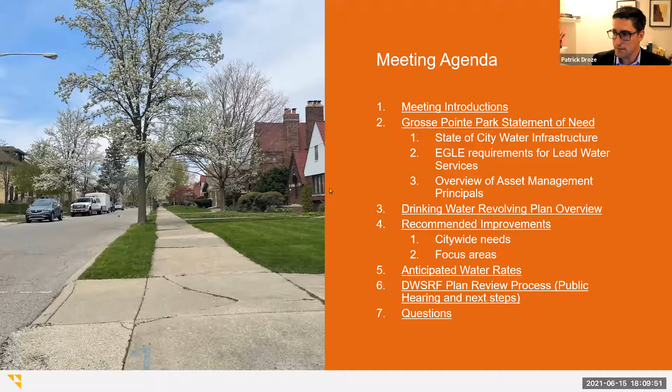Okay, hearing none, we'll get started. So when we talk about the water system as a whole, as you mentioned at the beginning of the meeting, Mayor, people don't talk a lot about water mains and sewers, and the reality is it's buried infrastructure. It's been there for a long time, and unfortunately with infrastructure like that, it doesn't really get into people's minds until something happens, like a water main break or a sewer collapse.

But in our case, with the City of Grosse Pointe Park, we have a few drivers about why it's time to start looking at that. One thing is just the age of the infrastructure. Throughout the city, there is a very high percentage of the pipes in the ground that are original, going back to the 1920s in many cases. And although things were built very well back then, the accepted life cycle for cast iron water main of that vintage is around 100 years or less. So we're starting to get into the point where breaks may become more frequent and more impactful as those happen.

The other part of that is our water meters. We have old water meters, and what typically happens with those as they age is they become less accurate and more difficult to maintain. So water meters has been something that the city DPW has identified for a long time as something of interest. The other change we'll talk about is the lead and copper rule.

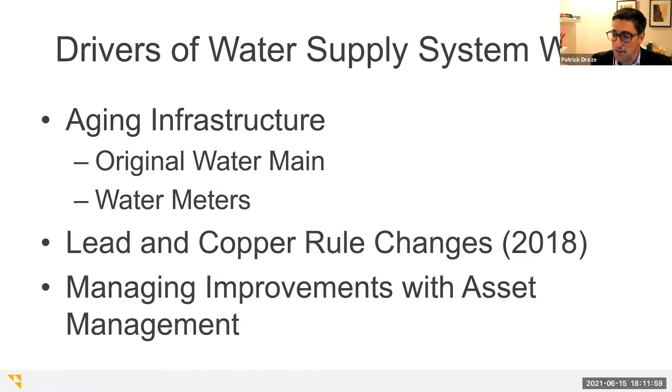So that's just a program that the city is adopting as part of their management of the existing system.

Looking at our aging infrastructure, our mains in general are really approaching the end of their design life. Most are getting near 100 years old. What we're starting to find is that there's an increasing number of breaks. This is the average breaks per year that we're seeing, and this is data collected by DPW.

As you can see over the last 15 years or so, that rate has started to go up. That can mean different things. Water main breaks can happen in somebody's front lawn, or on Mack Avenue. Those mean different things in terms of costs and impacts to businesses. But the reality is that the number in general is going up, and it's what we'd expect as mains get older. Especially because once we get to that 100-year mark, we're really at the end of the useful service life.

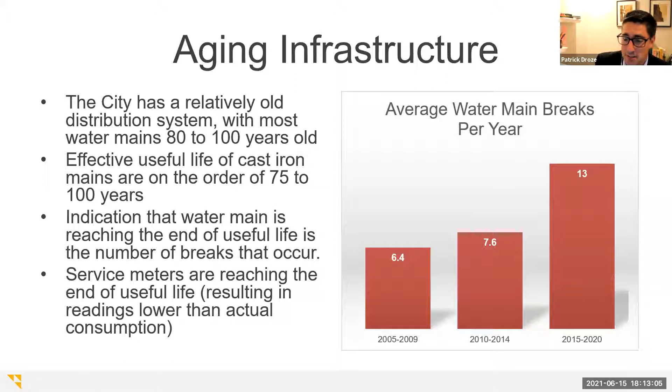The same goes for the meters we mentioned—those are also in disrepair and harder to maintain, just because parts are not available for some of the meters still in the system.

On lead and copper, we're all aware of the changes to the rules on lead and copper. It was brought to the forefront by the Flint water crisis years ago. But what it's resulted in is that the state of Michigan now has the leading edge of what's required for water quality relative to lead. The state, with its changes to the lead and copper rule, has reduced the action level to 12 micrograms per liter.

There's a very rigorous methodology for how samples are taken at homes throughout the city, looking at actual taps. You collect samples at those locations, get them analyzed, and report them to the state of Michigan. If you're above that level of 12 micrograms per liter, the state will require that action be taken immediately to deal with that.

The good news is that the city of Grosse Pointe Park receives its water through the Great Lakes Water Authority. We have 3 separate connections. The Great Lakes Water Authority does all the treatment of the water and also puts in additives to prevent corrosion. So even if there are pipes that might have lead in them—certainly old brass fittings can—the corrosion protection put into the water prevents that leaching of lead.

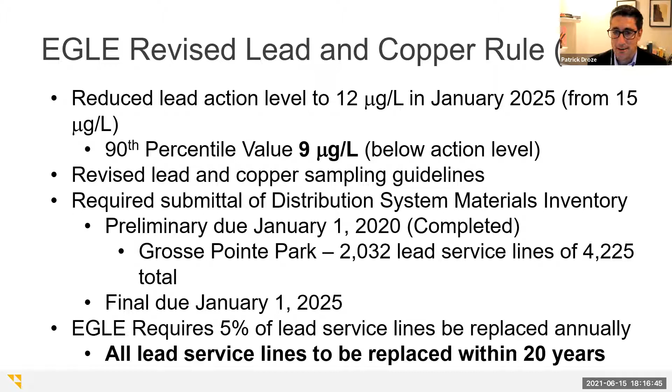What the state of Michigan is going to require is that communities work to address 5% per year. Beginning in 2025, there will be a requirement that cities have a plan in place to deal with the lead service lines. It averages out to about 5% per year, so roughly that's about 100 services that would have to be taken care of.

Patrick, can I ask you a technical question at this point about the definition of the service line? You indicated it's the line between the house and the main, which I understand. Somewhere between the house and the main, pretty close to the main, is typically what I refer to as a

curb stop - the valve that can be turned on and off. Does a service line include, when we talk about service lines and the probability of lead, all the way to

the main itself, or just to the curb stop? So the service line itself refers from the main all the way to the house, so it includes that curb stop.

There's actually been a bit of spirited debate amongst the utilities, especially in Southeast Michigan, about who actually owns the service line between that curb stop, which typically is at the sidewalk, and the house. Traditionally, that's been determined to be private infrastructure, but it's basically been agreed to at this point that municipalities are responsible all the way from the meter to the water main, so that includes that curb stop, that whole route.

Yeah, I understand that. In fact, that is a change - what you just described is actually a very important feature of this going forward. As private infrastructure, anything we do on a service line would be billed to that individual customer. But as public infrastructure, the cost of anything we do to that service line is borne by the entire municipality. So it's an important distinction in terms of ownership.

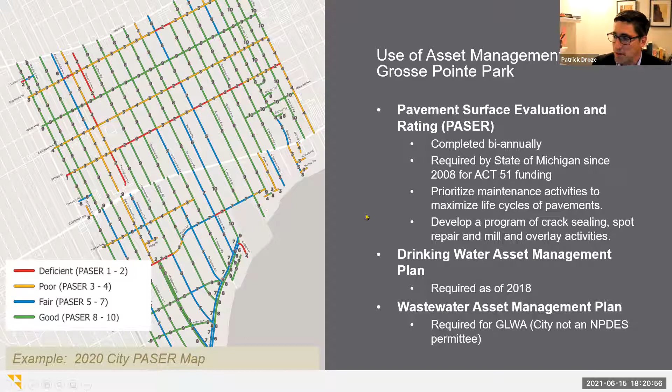As I mentioned, asset management has become more of a requirement, not only just from best practices, but also relative to permit obligations. So in 2018, water systems were required to comply with that, as well as wastewater systems. Now the city itself is nested within the GLWA system, so we don't have an NPDES permit specifically for the city, but if you had your own treatment plant, you would have to comply with that - asset management for your whole system.

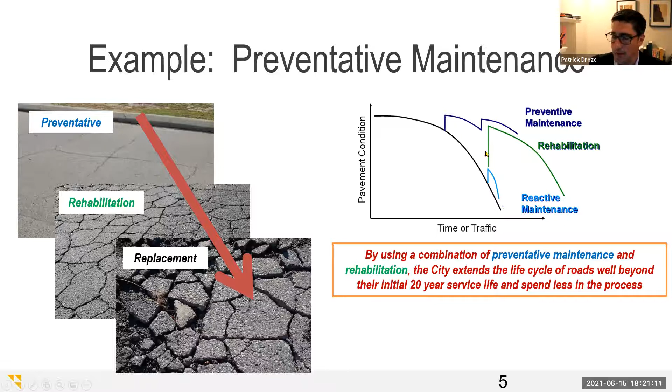This is just an example. We're basically showing that it's many times more efficient to do preventative maintenance early on versus waiting until it goes to total failure and you have to make a larger investment. So generally, this example shows if you just let everything go to full decay and then do large interventions, in this particular example, you're going to spend more money maintaining the same average.

Actually, this is a slightly less average rating. In this example, over the 36-year lifespan, we spend $3.30 per square yard per year, and the average rating is a 6.

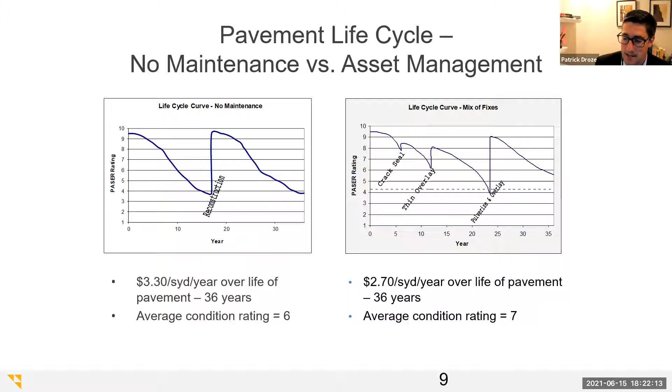We can spend a little bit less and do it more in a preventative nature. On a pavement example, we might do crack sealing, then a really small overlay, and then a more rigorous overlay 20 years down the road. So we might do smaller interventions spread out over time. We have a better overall condition and spend less on it. That's the whole perspective on asset management: we try to maintain our system and work on the priority assets at the right time.

So with water, it looks a little bit different in terms of how we manage that. We really rely on the asset management plan, which Nick has mentioned. That document is an appendix within the project plan. If you care to understand the details, it talks about how various segments of water main or areas of the city have been identified as priority.

It really looks at things based on the data of the main. So we look at how big the main is, the water main size has kind of changed. There are some instances in the city where we have smaller diameter mains, might be 6-inch mains. Typically now we require that everything is 8-inch or larger. The smaller mains have potentially less pressure and can provide sometimes less fire suppression. So those are identifying properties of mains that might need replacement.

We also really look at some of the business risks of the mains. To put it plainly, a break on a residential street may have an impact to residents, like potentially a loss of a driveway temporarily or some street flooding. That might be a different scenario if it plays out on Mack Avenue, where you have more paved surfaces. Those mains are more expensive to break, and they could potentially impact critical businesses, doctor's offices, things like that. So those are other parameters used in the business risk evaluation.

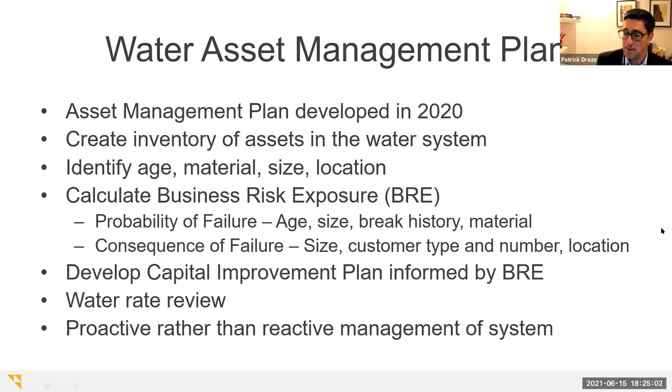Ultimately, all that analysis eventually goes into developing a project plan, which we'll show you in a little bit. We try to also review that against the water rates. There are a lot of needs, and we want to balance that with being cognizant of what that's going to do in terms of a rate increase, because there's obviously a cost to that work, and how do we spread that out over time for the community.

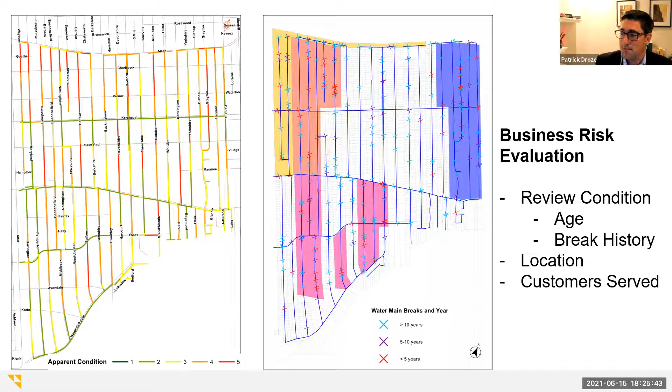This is just kind of a high-level review. We'll show these with greater detail later, but you can see these highlighted areas here. These are the priority areas, which we'll document a little more later in our presentation. The small X's you see throughout here are the main breaks. That's one of the things, along with the apparent condition, that we'll use to help identify where projects need to happen. The other component of that, of course, is the lead service lines, which we also use to help identify where those potential projects might land.

Before we go into the DWRF section, any questions about that last discussion?

I just have a quick clarifying question from residents, following up on what the mayor was saying. When we talk about lead service line replacement, is it all exterior, or both exterior and interior? Typically the way the rules are written, it's about 95% exterior, but we will come into the house, into the meter. The typical measurement is no more than 36 inches inside the house, and that typically gets you to the meter. So there could still be piping on the resident side within the house, but the guidance from EGLE says basically to the meter or 36 inches, whichever is shorter.

That's somewhat analogous to what DTE has done with the gas mains or with gas service lines.

Sure. Okay, thanks. Yeah, sure.

Also typically with a lot of those houses, the service lines come in at different spots, especially with finished basements. So if you've got a finished basement, you may have to access a different spot. With directional boring, a lot of times you can do it right at the front wall, or they'll have to go underneath and maybe go 5 to 10 feet inside the house itself, underneath of course.

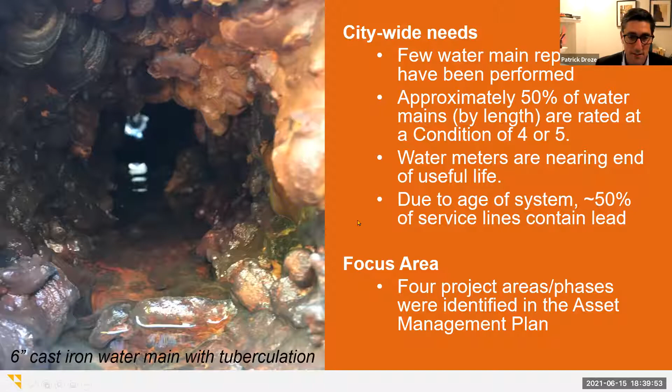Generally speaking, some of the main recommendations are that any smaller diameter mains, generally ones less than 8 inches in diameter, need to be replaced. It comes down to there being diminished water quality, lower pressure, and the ability to provide flow is compromised with these smaller mains.

We also recommend looping, which basically takes any dead end main and connects it to the network, and that helps with overall pressure and water quality. We also look at replacing our hydrants and valves within the community.

If we go through the effort of replacing mains and service lines, we want to make sure that the valves we use to control the system are also still in working order. We mentioned also that the water meters would be replaced at the same time as lead services.

Interestingly, if you disturb any portion of a water service doing any repairs, there are protocols required to be followed now relative to the lead and copper rule. So even if you decided to just do meter replacement, there are still steps necessary to make sure that water is safe before we turn it back on.

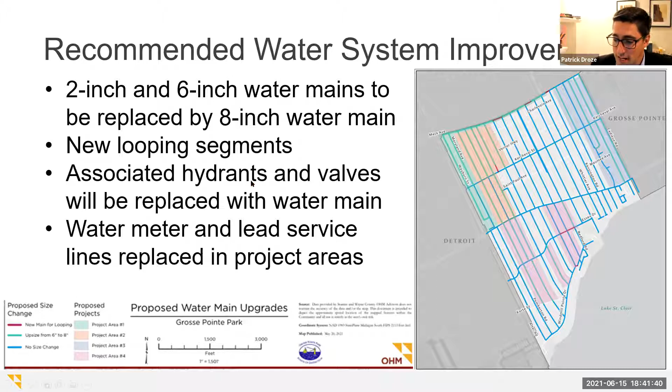So these projects make sense to layer on top of each other, because if you're already digging up an area, if you're already replacing a water service and the main itself is old, there's usually economies of scale for bundling those into projects. I'm going to go through a couple of the project areas.

Generally speaking, water main replacement is part of every one of these four phases that we'll go over. There are slight variations about how that would get built, and the project plan basically lays out alternatives for how we can do that.

There's what we call open cut construction, which is what you might assume: an excavator digging down a trench about 5 feet deep, putting a new pipe in the ground, connecting water services to that pipe, backfilling, and then restoring any of the impacted areas.

The other method we looked at was what we call trenchless installation, similar to what DTE was doing with new service lines or new gas mains being put in through the city, where we identify locations where the new pipe can be pulled into place, and try to limit the number of excavations that we make.

Even with that, there are still impacts. Of course, sidewalks and driveways get impacted, but we try to work in those greenbelt areas. By using directional drill, we can also try to limit the impact to tree roots. If we do open cut, even if we go around the trees, sometimes there's damage done to the root systems that can compromise tree health. So directional methods of installation are preferred, especially with so many mature and well-maintained trees in the community.

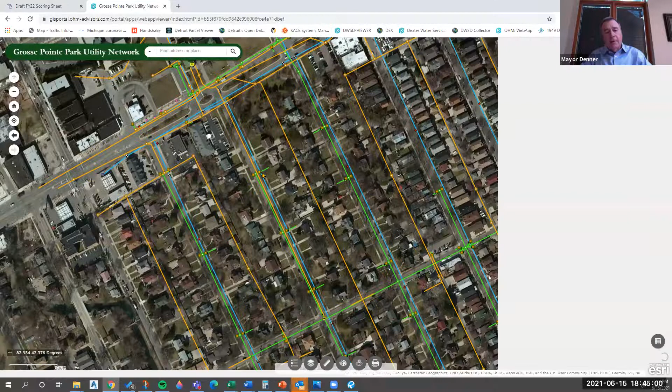Yeah, I can confirm that, ask anybody. I'm sure Pat can as well. Thinking back to the sewer separation project, which went right down the center of the streets with an open cut, it was extraordinarily disruptive, and it took years before you could really restore the smooth integrity of our streets.

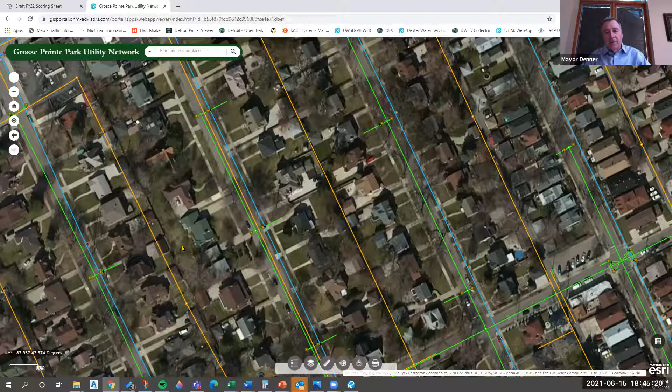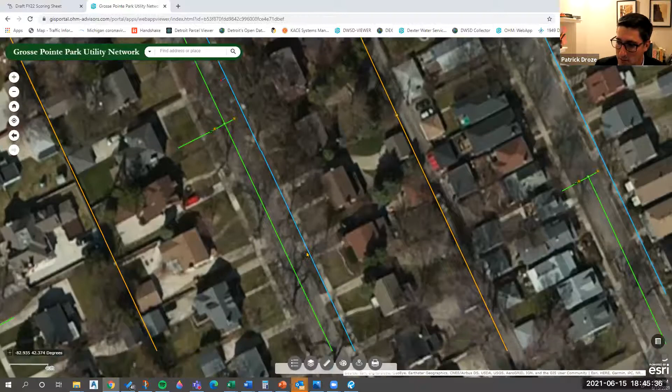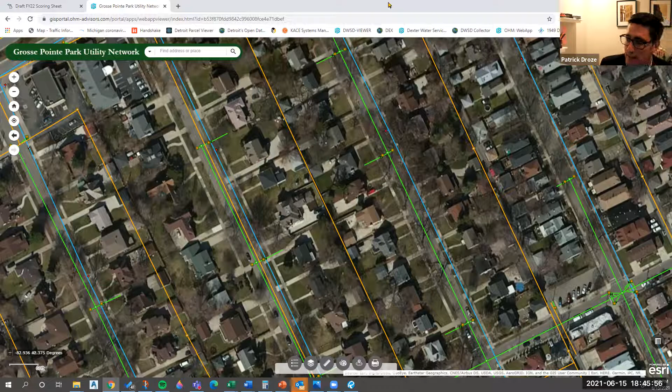Absolutely. I'm not sure if folks can see on my screen the GIS viewer, but this is just an example. Typically our storm sewers are down the middle of the road, as Mayor Denner was saying, and our water mains will often be in that greenbelt area. Sanitary sewer, in many areas of the community, is in the rear yard area. So the water main itself often would be located in that same area, or we might even switch to the other side of the road if there's a corridor. That can vary from street to street, but generally we find it's most cost effective to focus that main somewhere in that greenbelt area.

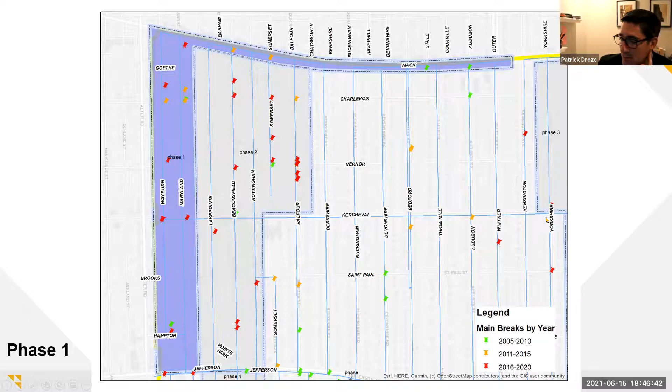Now, interesting about phase 1, we have a photo here on Mack. Phase 1 works north from Jefferson on Wayburn and Maryland, but we also have Mack identified. As we mentioned earlier, one of the things we look at is the presence of breaks. You can see there are a number of breaks in this particular area, but we also have the consequence of failure. If a main does fail on Mack, it's an impact to businesses. Those are generally more expensive because we have to restore roadways and sidewalks, and there's even potential for property damage depending where it happens. So this was identified as a high priority project area because of all those factors, and this would be our phase 1 project.

There are 4 phases that we talk about. We envision that this would potentially be a 4-year project where we'd do one phase per year, just to control where the work is happening and make sure we can keep contractors contained year after year.

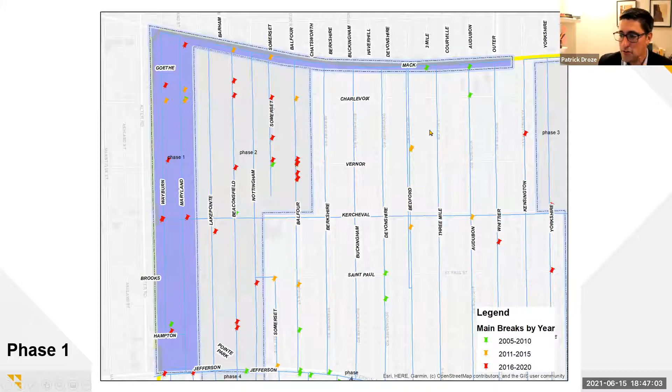Phase 2 is very similar. Again, we're looking in this case at Lakepoint, Beaconsfield, Nottingham, as well as Somerset and Balfour. I'll show you the similar map on the next slide. We'll be doing the same with trenchless installation, and about 400 lead service lines in this particular area. We've recorded about 10 breaks since 2005 in this area. So in this example here, again, here's our greenbelt area. The main itself could go somewhere in here, or it could actually go into the sidewalk. We would identify, based on what other utilities are in the area, what makes the most sense from a cost effectiveness standpoint.

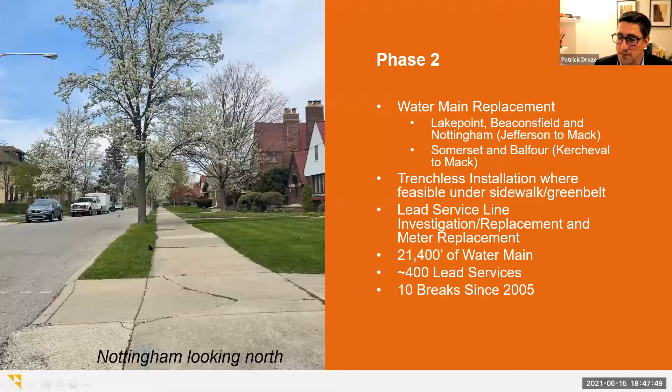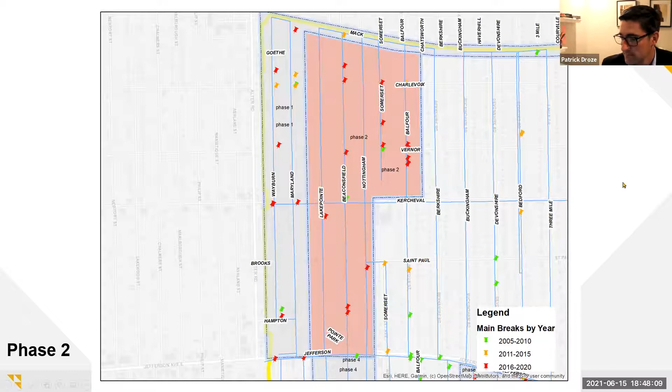Again, here's our limits for this particular phase. You can see there is a concentration of breaks in this area, and the presence of lead service lines helps to elevate this particular project as a recommended focus area. And again, this is phase 2.

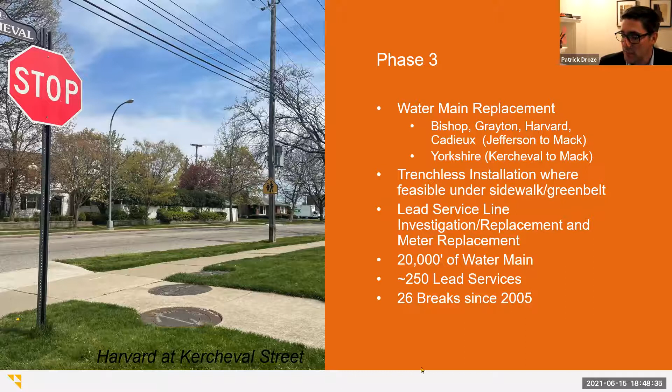Phase 3, this time we'd be looking at Bishop, Grayton, Harvard, Cadieux, generally from Jefferson to Mack, as well as Yorkshire between Kercheval and Mack. A little bit longer here - we have 20,000 feet of water main, slightly less lead services, about 250 compared to phase 2. The issue here is we've had a higher number of breaks in this particular area. So again, this is our limits here. We'd just be doing main replacement. The section on Cadieux would be on the west side of the street, obviously.

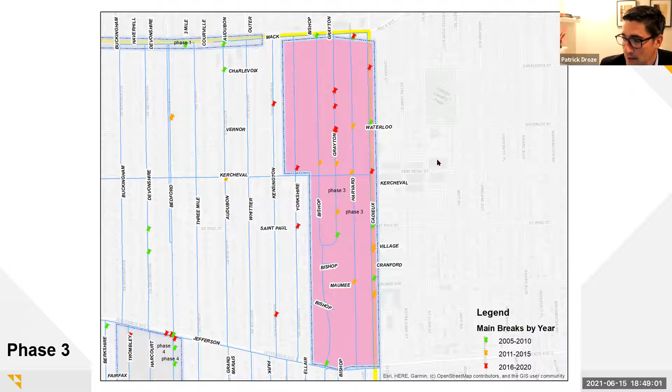This again is phase 3, which should probably be the 3rd year if we were to roll these out over a 4-year program. Phase 4, we'd be looking at Lakepoint, Beaconsfield, Nottingham between Forte and Jefferson, as well as Balfour from Windmill Pointe to Essex, Trombley and Harcourt between Windmill Pointe and Jefferson, and Bedford from Essex to Jefferson. That's 22,000 feet of water main, about 125 lead services, so slightly less services in this area, and about 34 breaks since 2005.

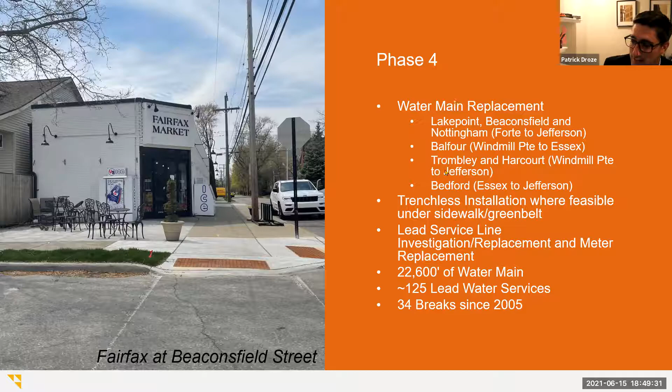This is a little more cut up, again based on the presence of breaks. For instance, on Balfour, we do place a little more importance on some of the more recent breaks too, especially if we start to see them pop up with more frequency. You can see, particularly over here on Bedford, there's quite a few breaks in this particular area. So this is, again, some of the background about why these particular areas are noted. But this would be that phase 4, which would be the 4th year of the program.

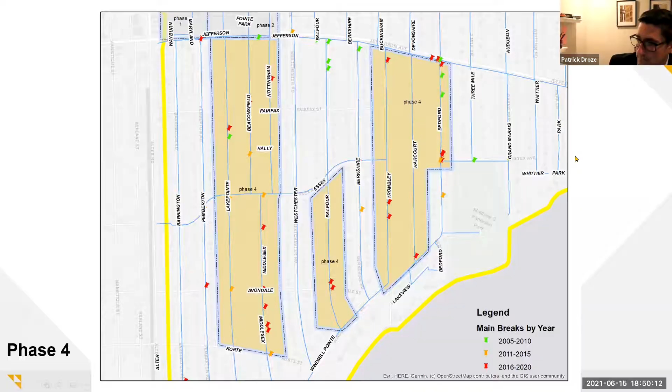So there's a question about cost and what that potentially means from an impact statement for the homeowners in the area. The project costs are estimates based on unit prices. We look at projects in other communities using similar materials, and we also look at trends in contract pricing, and use that to determine what we estimate a cost to be for a given project.

So in total, if you add all these projects up, it would work out to about $27 million worth of infrastructure investment. As Krista mentioned, there's a 20-year and a 30-year loan period. Just to show how that would impact a bi-monthly bill, if there were no other adjustments to rates, those rates could change up to $66 for the bill, or $49 for the 30-year term if that was used. So either one could be used.

There's just some differences with the interest rates on those, and how long the payback period is. So those are not insignificant amounts. We would certainly acknowledge that it's an impact for sure. But it takes a very significant impact to the lead services, which, as mentioned, will be required to be replaced within 20 years. In addition to the mains themselves, we knock out about 60% of the services within a 5-year period. So in many ways, you're getting ahead of things. Where you really have 20 years to do that, you'll be at 60% completion of lead service renewal within the first 5 years, which makes the burden of doing the renewals for the remainder of the system something you can spread out for a longer term.

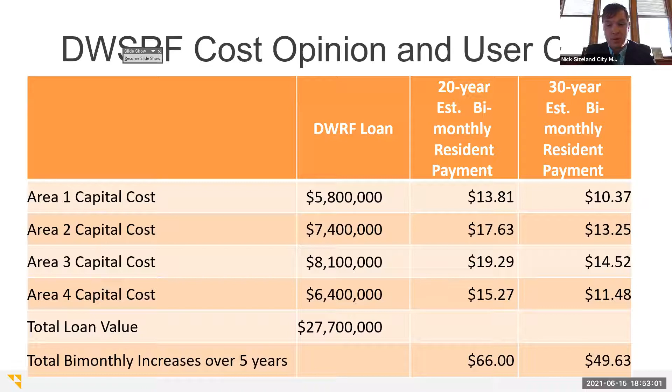And Patrick, just to put this into perspective for the public and committee too — if we were to look at the sewer separation that was passed by voters about 20 years ago that Pat Thomas worked on, the millage rate for that was 2.55. So if we take the average taxable value of a home, let's say $150,000 within Grosse Pointe Park, we were looking at about $380 a year for the sewer separation. So we're right around the same, if you average out either the 20 or 30-year costs of the sewer separation project and what this project would be.

So you're looking at potentially about $300 to $400 at our estimate right now if this full project were to go for the $27 million over a 20-year period. And that sewer separation project was retired in 2018, I believe.

So you're saying the average taxpayer would see an additional $300 on their property tax bill? Per year, yes. I think the way this is funded, though, would be through water bills as opposed to property — yeah, sorry, it'd be through their water bills.

And if I could just clarify, just confirm — that's not per household, that's per resident? It's per bill, so per meter. Okay, all right, thanks.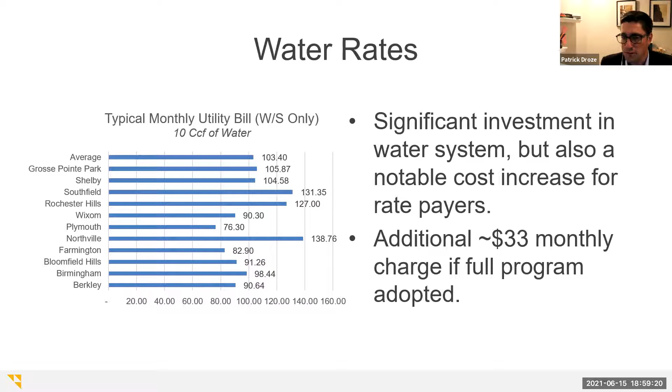Within the project plan, there's a section of the report that goes into greater detail about this, with the interest rate and number of accounts. So if there's questions about how that particular cost was calculated, there's additional information there.

Any questions about that rate discussion? Okay.

Krista, do you want to touch on these next steps for the project plan? Sure.

The public notice for the public hearing was published in the Grosse Pointe News on May 27th. We need an affidavit from Grosse Pointe News showing that it was published, which we need to include in the appendix to the final project plan. The public hearing is scheduled for June 28th, 2021, a Monday, and as part of the project plan requirements, we need to provide a recording of that public hearing.

We need to provide that link to EGLE, and then EGLE will look to see which of the project plans they actually did receive and adjust their project priority list, possibly rescore some of the projects based on the details provided, since the intent to apply form is pretty general. They would usually public notice that list in mid-August, then hold a public hearing on the list for people to make comments, which usually happens in September or October before it's finalized.

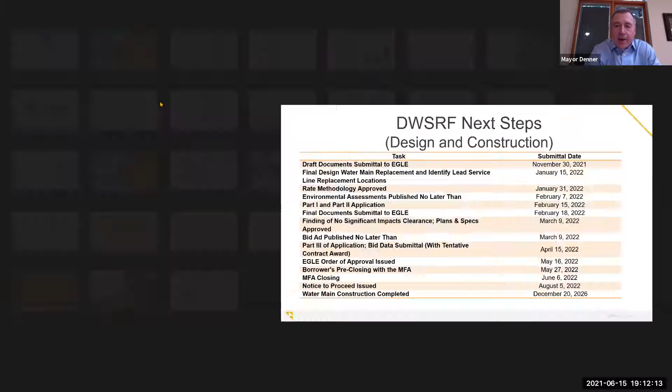So it's a tough decision in some ways for the city, and we're going to ask council to consider at least the first step, which is to apply for the revolving fund after the public hearing on the 28th. If we don't make the cut, then I think the conversation moves to the administration and our engineers continuing to do some analysis. At that point, council would have to decide whether to try again next year, do a little bit as necessary, or proceed on a bonding strategy.

I've thought a lot about this over the years, and I was unwilling to take on this kind of an annual burden for our residents until we got sewer separation paid for. That was a fairly significant burden on the city, which obviously had great benefit, but it was a big burden on the cash flow of the city. With that off the books starting in '18, that helped us.

Realistically, though, we have put some things back on the books, and the residents did approve millages for our roads and public safety. I would say that, as much as anything, that was to compensate for the unusual way municipalities get financed in the state of Michigan because of Headlee and property tax limitations. So that's my little speech on this, but that is the decision the city is going to be faced with at some point.

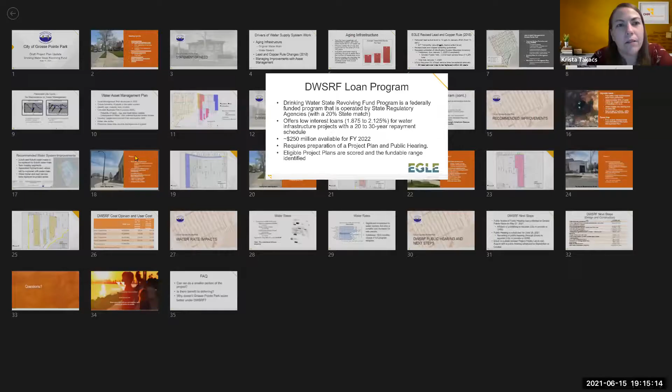But maybe speak to that a little bit more, Krista. By passing the resolution, you are not committing the city to going forward. I think at that point you can still say, we prefer not to be considered. I would say that by mid-August, when the list of priority fundable projects is published, if you were to be on it at that point, you would need to say yes, we're going to go forward with it, or please take us off the list.

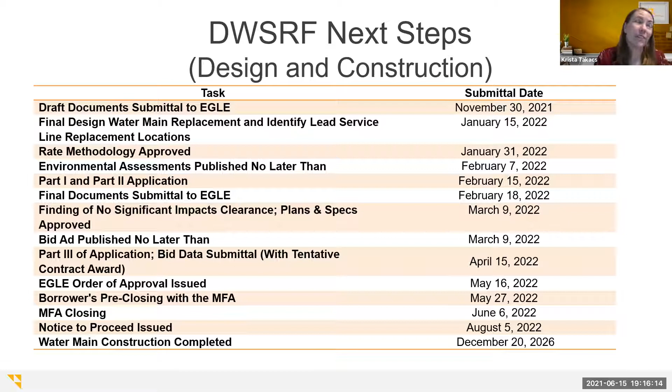You can do less than what you're proposing. So if you wanted to do phases 1 and 2, but not proceed with phases 3 and 4, you can make that decision. You couldn't say we'd like to replace phase 2 with a different area of the city that we did not discuss in the project plan, without submitting an amendment to the project plan. Typically, EGLE does not like to see those off cycle, so you would have to wait and submit those next July 1st. I would hope that we wouldn't need to do any of that, but I just wanted to get some understanding.

So it's an important milestone for us, June 28th.

I have a question. Is there any way that us pursuing an alternative like the bonding would allow us to expedite these things? It's still a pretty long timeline. I'm just curious if we did option B that you mentioned, would that allow us to do these things more quickly? I think local bonding will move much quicker, at least in the initial phase of things.

There's still definitely some time and energy needed to design and permit the improvements. Typically on a municipal utility project, say you were to say we want to replace a water main next summer, the process we would typically follow on a local project, assuming you have funds in place, we would start on design, where we go out and understand where all the utilities are, topographic surveys, request information from utilities, design, and then there's a permit phase where we submit the documents to EGLE to review and permit. That typically is conservatively a 6-month process.

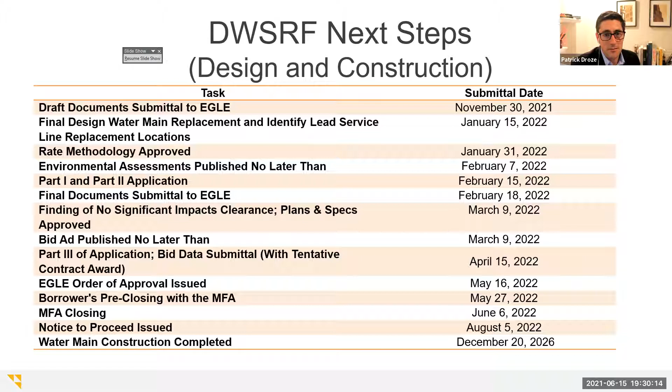We built in about a 10 to 15% contingency. They have a standard contingency we carry for design and legal costs that typically get included, though we don't see a lot of that in this particular project. We do have to do a rate methodology through the process, and design is part of it. In some cases, like building a new water treatment plant, you'd have to acquire land and easements, but our work will be, with the exception of lead service lines, all within city right of way, so we don't anticipate needing to acquire land as part of this project.

Thanks, Patrick. I had a couple questions. One is, what does it typically cost us just when we have a main break unexpectedly?

As far as water main breaks, it depends on where it's at. Like on Mack Avenue, the impact on businesses depends on whether we can get the main shut down properly and isolated in a good area. The valves are so bad sometimes you've got to go back the street, so then you've got residents included too. Typically on Mack Avenue we require 4 people, that's an OSHA rule, along with cones and everything else. It typically takes anywhere from 6 to 10 hours, with manual labor, cleanup, repair of the street, and backfill of 21AA. You're looking at probably $7,000 to about $9,000.

Okay, thank you. And the other question I had was, one of the slides indicated that without replacing the meters, we're not getting proper readings on the amount of water that's being used. So one thing to keep in mind in terms of informing residents is that it sounds like their water bills are going to go up as well.

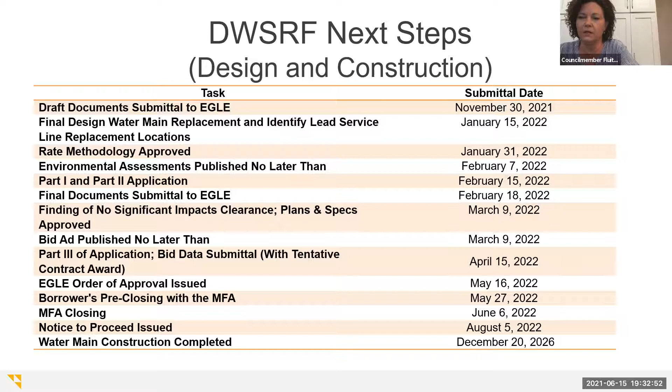So a more accurate meter saves the city money, but it costs the residents because now they're actually paying for the correct amount of water they're using.

Exactly. And what can happen too is that, because there's a cost to acquire water from GLWA, as well as operational costs the city tracks annually, that cost gets spread out. So if you have certain homes with very slow meters and some that are more accurate, it can disproportionately assess those costs onto the folks with accurate meters, because it assumes they're using more water when that may not be the case. So having a system with consistently operable, accurately reporting water meters makes sure everyone is really paying their fair share for how much water they're using.

Right. The other thing to keep in mind on flow rates is that over time, GLWA, Great Lakes Water Authority, has moved a lot of their costs from flow rate to fixed. So while it's absolutely true that more accurate meters give us better reads and more accurate revenue collection, as a percentage of the bill it's not as large a percentage as it was, say, 10 years ago, when it was a significant component of everybody's bill.

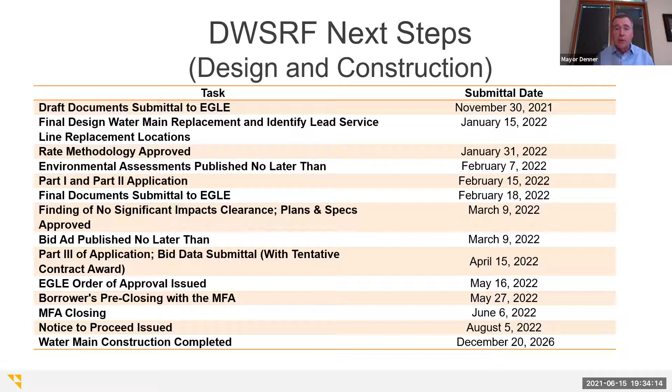Today, it's still obviously an important component, but has diminished in its percent. I don't know exactly what, but Great Lakes Water has moved cost from variable to fixed.

The other question I've got, as we're thinking about cost and other charges, is assuming the federal relief money comes in as anticipated, we're expecting a little over $1 million to Grosse Pointe Park. Some of that has to be used for purposes other than underground infrastructure, but some could be applied to water infrastructure—let's say $600,000, $700,000, $800,000, something we probably could count on applying. Nick, has the city thought about what the priorities would be when that money comes in? Would it be to begin phase one essentially, or would it be to pick up some of the things left out? Have we thought about how we might apply that money?

Speaking with the DWSRF project, our first priority was phase one, which is the Weyburn, Maryland, and Mack Avenue area. Our initial strategy was that if we applied for DWSRF, or ended up going out for a bond, and identified those areas of lead service line and water main replacement, we could use those funds for other areas of the community that aren't as much of a concentration. That's why Patrick and his team had those different areas, because that was the highest concentration of main breaks and lead service lines we could tackle all at once.

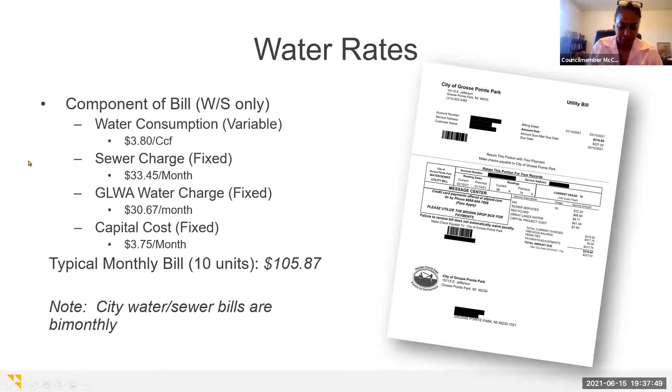Can I just—so we're not restricted to using the rescue fund dollars for projects with specific outcomes due to COVID? I know infrastructure was on there. I've been feeling pretty confident about this, but someone else has made me second guess it a little bit. So I just want to make sure that's okay for us to use those dollars for that kind of work.

And when you said the 133 lines replaced, would that also include the water main or any related infrastructure replacements at the same time, or no? That would only be lead service lines. It's average about $6,000 to replace just a lead service line per home.

Okay, sorry, to follow up on that—so after we've spent the $27 million, we'll be left with about 800 additional lead service lines that we still need to replace. That's correct. And at $6,000 each, correct? That's correct.

Okay, so I feel like, possibly not by the special meeting on June 28th, but we also need a plan for how and when we're going to get the rest of those lines replaced.